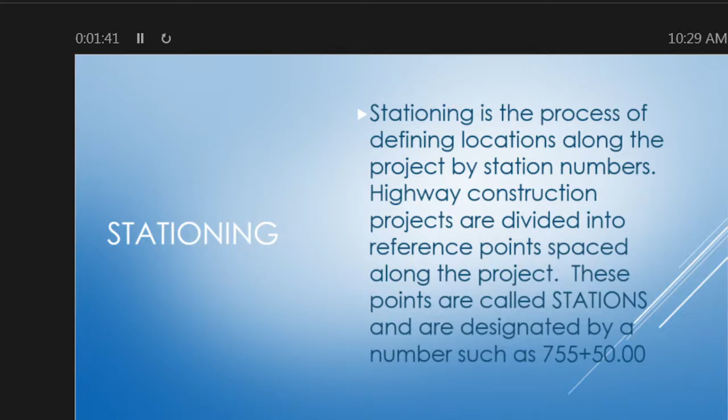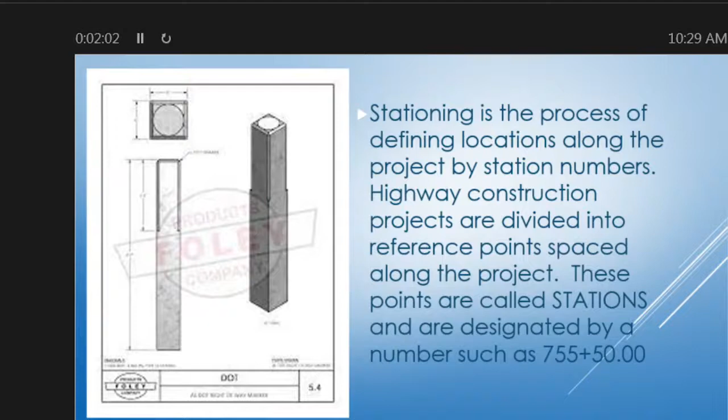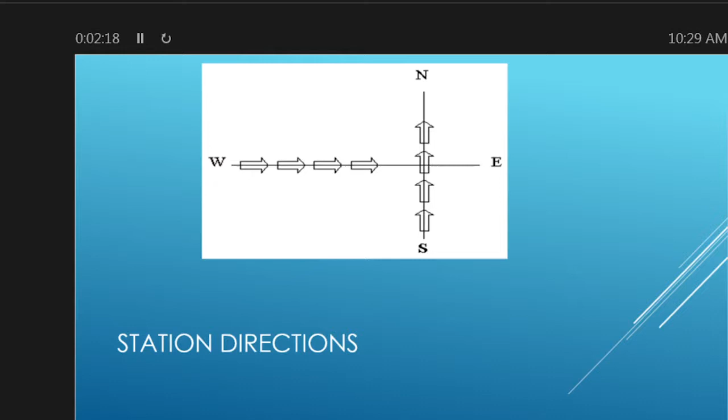Stationing. Station directions. Majority of the time, DOT will lay out their projects from west to east and south to north. It's a good little in-the-field reference.

Up and down station. You'll hear this in the field. You have up station and down station. Sometimes you might hear them as ahead and behind. The terms up station and down station are terms used on the job site to denote a direction. Up station direction refers to the direction of the station counting up. Vice versa, down station direction refers to the station counting down.

This is important because when referencing left and right sides of the project, it is referring to while facing up station. And that can be confusing. If you're looking on the plans and say you have drains on the left-hand side of the bridge, you've got to make sure that you're facing up station. That'd be the left-hand side, right-hand side. You can get confused if you're not facing in the right direction.

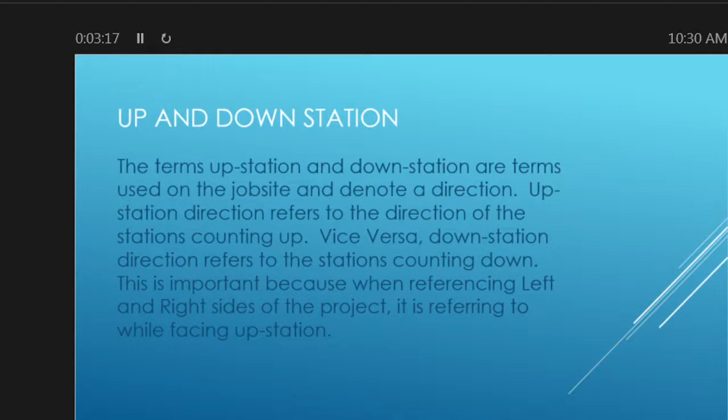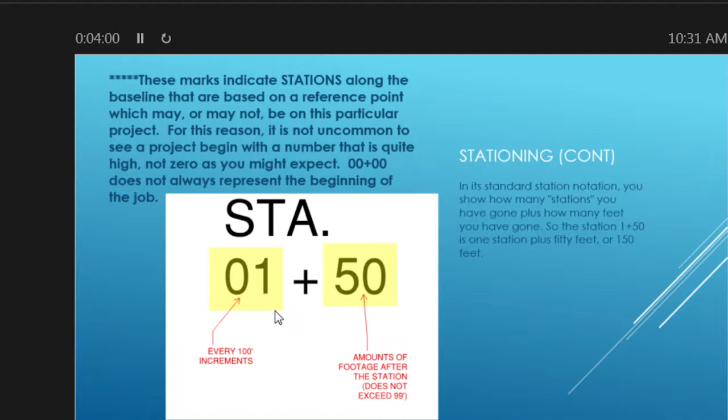This does not exceed 99 feet. The reason is once you go over 99 feet, you're at the next station. So in this situation, after 01+99, it goes to 02+00. It just counts up.

Distances can be calculated by adding and subtracting stations. Stations are shown as such: 11+55, where 11 is 1,100 feet and the 55 is the additional feet, i.e. 1,100 plus 55 is 1,155 feet, or 11+55. If you want to determine the distance, subtract the down station from the up station.

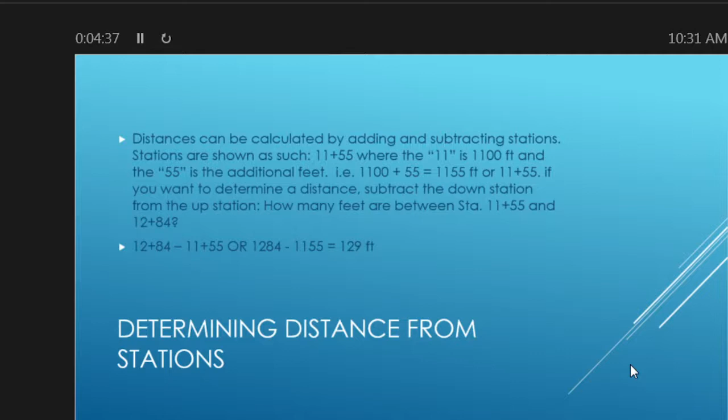How many feet are between station 11+55 and 12+84? 12+84 minus 11+55, or 1,284 minus 1,155, gives us 129 feet.

And here in this bridge example, you have back face abutment 1, begin bridge station 117+65. You have back face abutment 3, end bridge station at 122+11. The formula is up station minus down station equals distance. So in this case, 122+11 minus 117+65 gives us 446 feet.

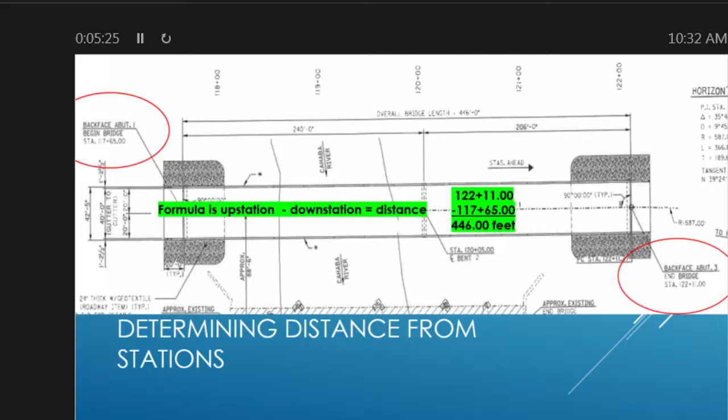Pretty easy. A lot of times it's just interpreting the words on the plans and knowing what you're looking at. On the plan sheet is a line running down the center of the proposed highway. This line represents the baseline. Follow the baseline and you will notice regularly spaced marks. These marks are stations. It is not unusual for offset structures, POI locations, and distances to be taken off

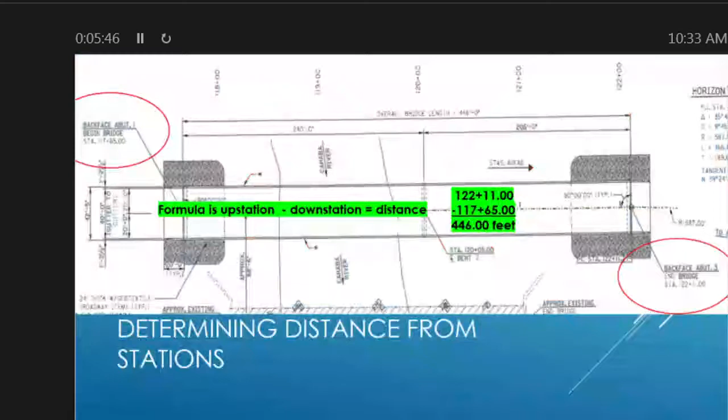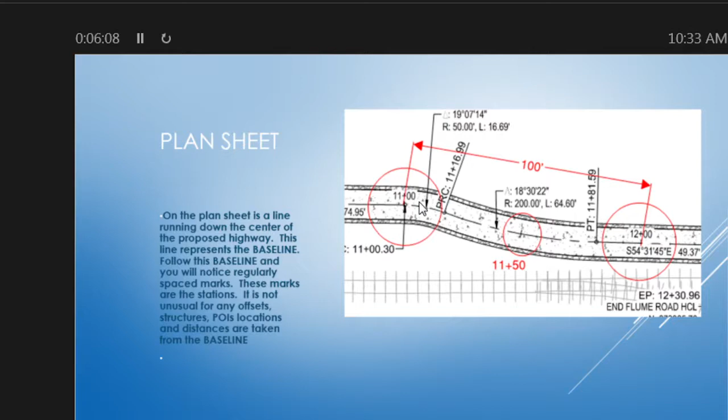the baseline. It's also referred to as the center line. Sometimes your center line and baseline might not meet up, but in most situations they do. So you'll see right here, you've got station 1100 and station 1200, 100-foot distances. Also, here's your baseline running through the bridge. Hash marks every 100 feet.

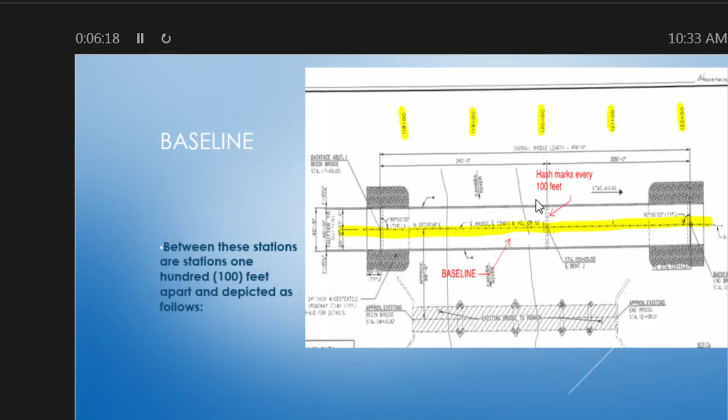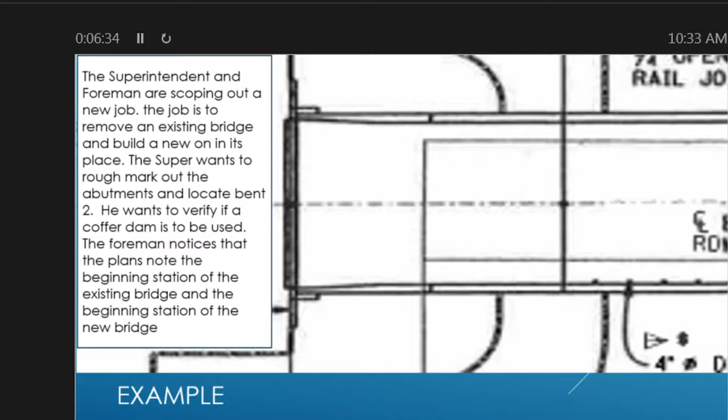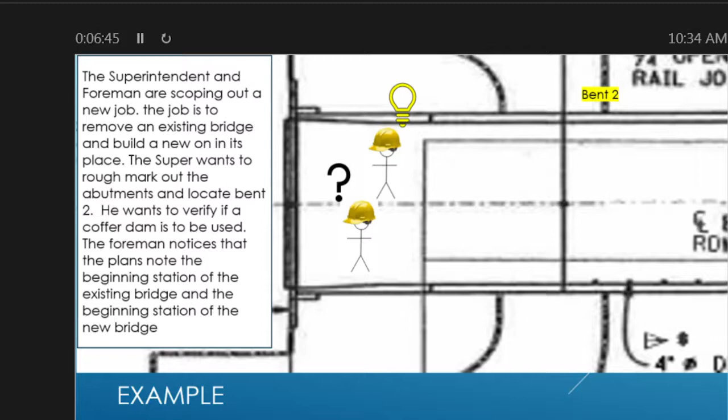And here's an example. The superintendent and foreman are scoping out a new job. The job is to remove an existing bridge and build a new one in its place. The super wants to rough mark out the abutment and locate bent 2. He wants to verify if a cofferdam is to be used.

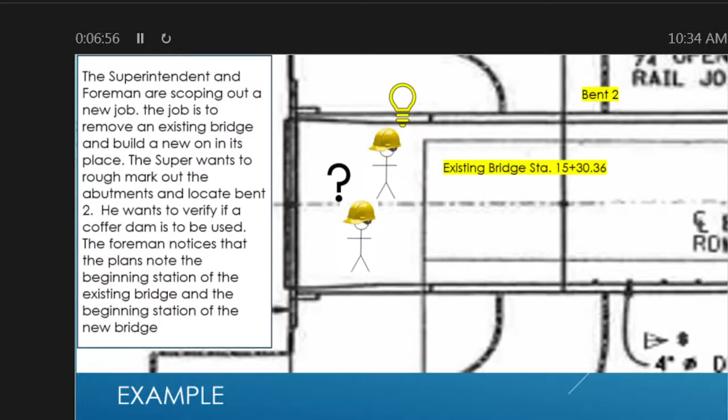The foreman notices that the plans note the beginning station of the existing bridge and the beginning station of the new bridge. The foreman then takes the station of the existing bridge, 15+30.36, and subtracts the new bridge station, 15+11, from it. This gives the foreman a distance of 19.36 feet, or 19 foot 4 3/8, approximately 20

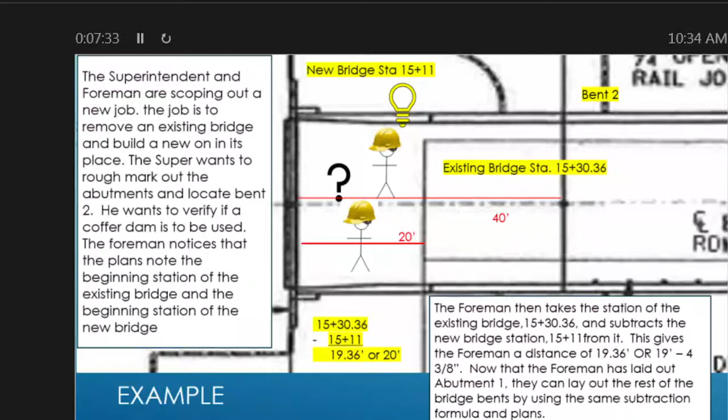feet. Now that the foreman has laid out abutment 1, they can lay out the rest of the bridge bents by using the same subtraction formula and plans. And no, they do not need a cofferdam.